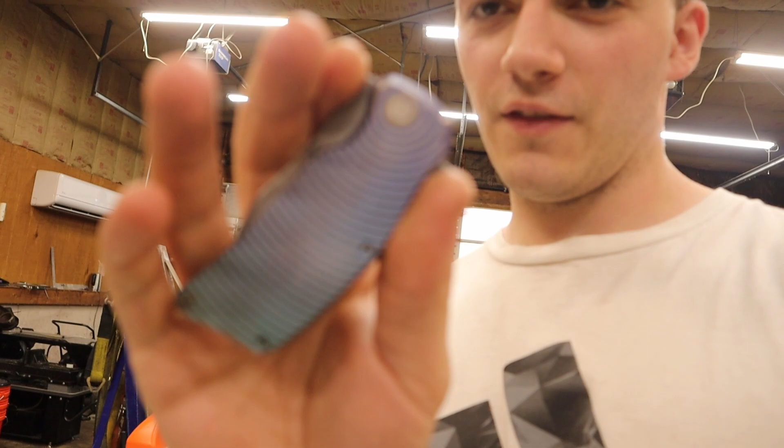I don't remember what I did in the last video, I think it was like 3 weeks ago. So let's just check knife progress. This is knife good, knife not sharp. Hold on. Yes, very nice. You got lucky because usually I can't flip it, I had to use gravity to help me out. Yeah, it's coming out pretty good.

So it's named Iris, and you might be wondering why it's named that. Well, Iris sounds pretty cool, so there you go. And yep, blade's looking pretty good, not sharp, but we'll talk about that.

The anodizing, the tool path, the fancy handle design - I mean, it's not fancy, but you know, it's different. Hold on, the camera focus is like way in the corner. Okay, here you go, there you go.

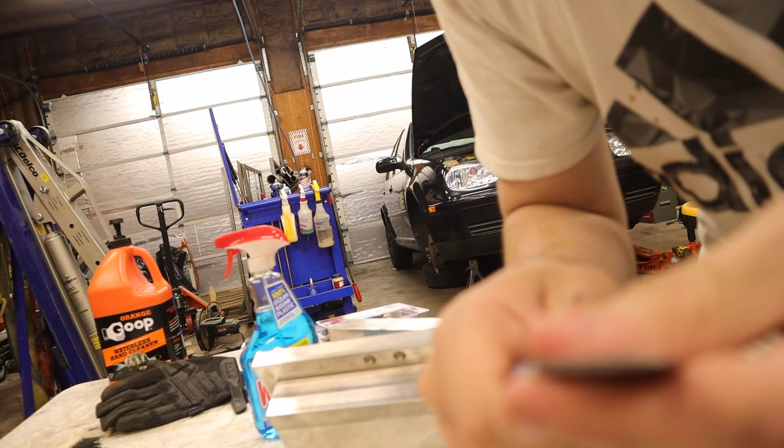So yeah, I still don't have threaded spacers because they're incredibly difficult to make. I mean, I have the spacers, but they're not secured, so that makes the knife kind of act weird. Yeah, it's very stiff. I kind of got the lock bar stuff pretty down, but yeah, very, very little to no blade play.

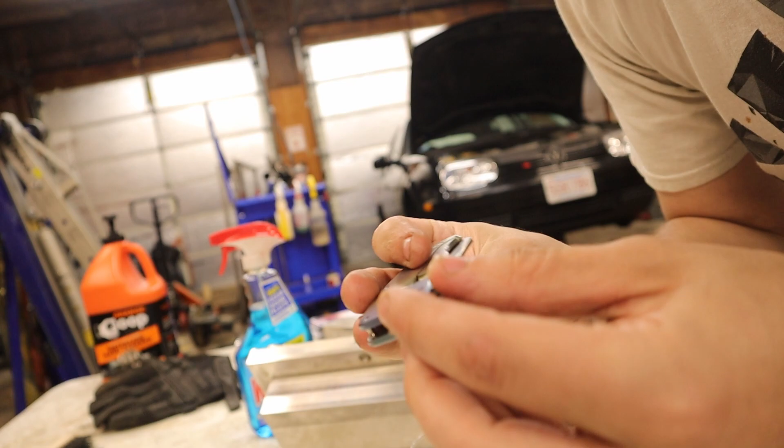Flipping wise, it kind of depends. Like right now, I think it's because the hardware is not in it, so I think that's kind of where I got my weird flipping motion. But yeah, it's coming along.

This is the backside anodizing. So what I did was I tumbled it and then I anodized it, so it looks pretty cool. It's kind of a rainbow, like a beat up rainbow, you know, we like that kind of stuff.

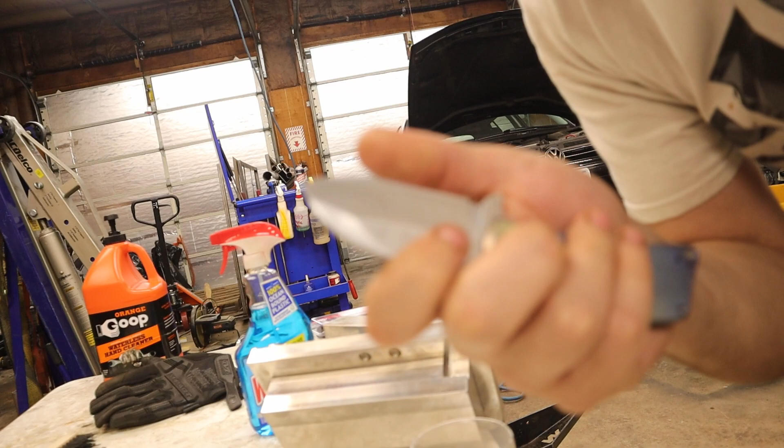I decided to remove any sort of feature from the blade. I think it looks a lot better with nothing on it. And yeah, this also isn't perfectly hand milled, but it is significantly better than the first one. On the backside, you can see there's some mill marks that were impossible to polish out.

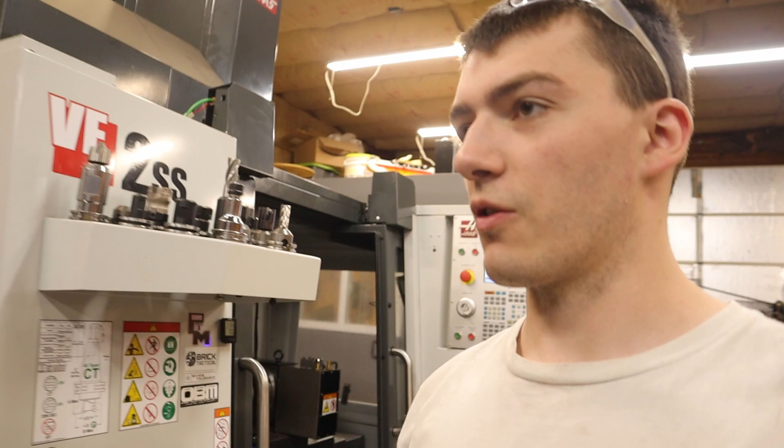Yeah, so why don't we talk about the belt sander that I got. So I obviously need a way to sharpen blades, so I needed a belt sander because I plan on making more than one of these blades sharpened, and a belt sander is kind of the way to go. So the belt sander I went with is an Origin Blade Makers belt sander. They're out of Oregon.

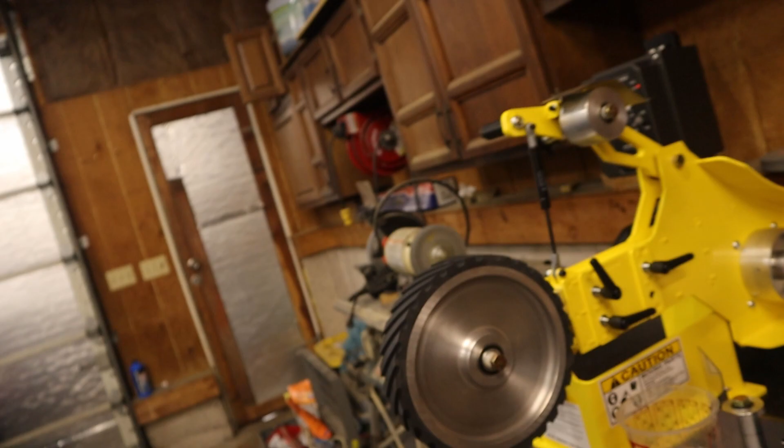Yeah, I mean, we'll just talk about it. So here it is, got a 10-inch wheel. I don't know anything about knife sharpening, so you're gonna have to excuse my noviceness. There's a flat platen with the tooling arm. It uses 1.5-inch tooling arms, standard.

The frame is steel, it's incredibly heavy. Like, just the frame alone was quite a lot to lift up, actually. So it's definitely steel, got this yellow powder coat. Would I say I'm a fan of the color? Maybe not necessarily, but it is just a color, and I could care less about colors.

The amount of research I did on belt sanders was mind-numbing and pretty annoying because there's a lot of different ones. Do you build yourself? Do you buy? So I ended up buying because I don't need to learn how to make a belt sander, I just need one. So yeah, it came actually really well packaged. I only had one damaged bolt or damaged piece, and it was this 3/8 bolt.

It was actually bent, which was pretty impressive, so it obviously took a nice hard fall on that side there. Yeah, it's packaged well. Like I said, it comes in cardboard boxes, but there's wood support, and it uses that expanding foam stuff, like the heat wrap stuff. So yeah, it was pretty well wrapped.

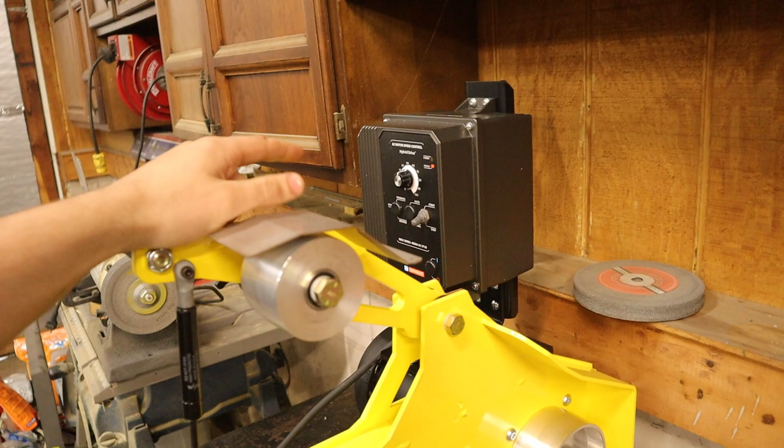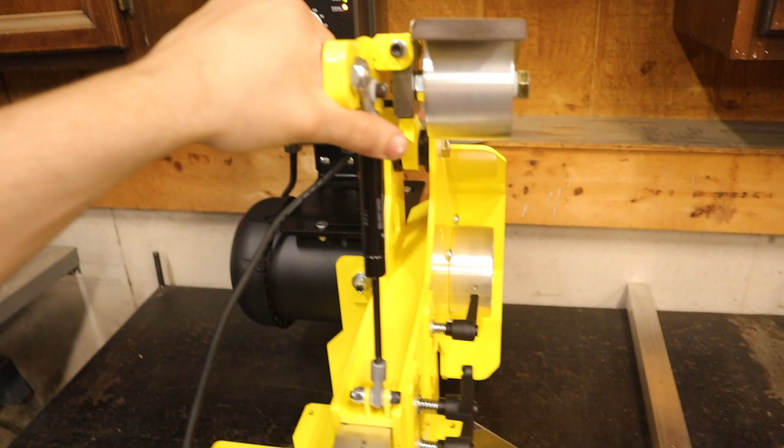The VFD and the motor itself, they come in different boxes because they're from different manufacturers. This is obviously on a gas strut, so I've heard gas strut's the way to go. I don't know otherwise because I don't have experience.

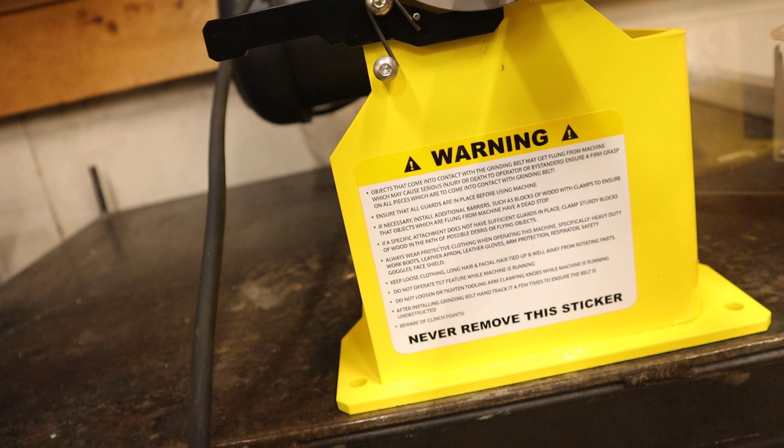It does tilt horizontally via this lever. You pull it, loosen it, and it actually has these - let me see if I can see - there's notches somewhere. On here there's notches. I'd show you, but it's not bolted down, and the motor's really heavy, so yeah, basically it tilts 45 or 30 and then all the way horizontal, so it's pretty slick.

I paid $2,200 after shipping.

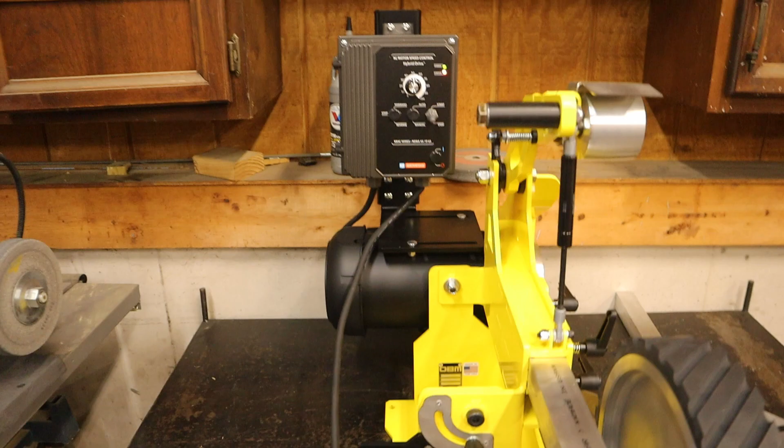So it's not cheap, the stuff's just not cheap. If you buy the motor and the VFD alone, you're talking like $700 basically. I think this VFD by itself is $500. By the time you build something that's really nice and spend your time, to me it's pretty close. You'd probably save $600, but it's a tough sell.

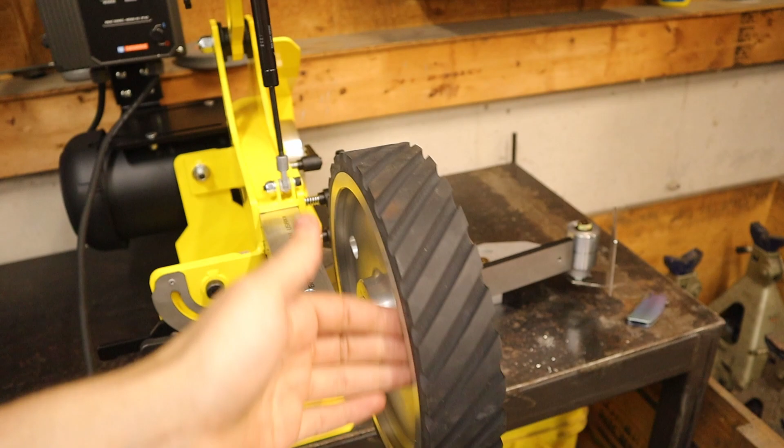This is extra, so I added this as an accessory. With the tooling arm and the wheel, that was basically $200 extra, I think. And it's balanced and everything. I actually haven't run a belt on it yet, as you can probably tell, but we can talk about the belts I got if you guys want.

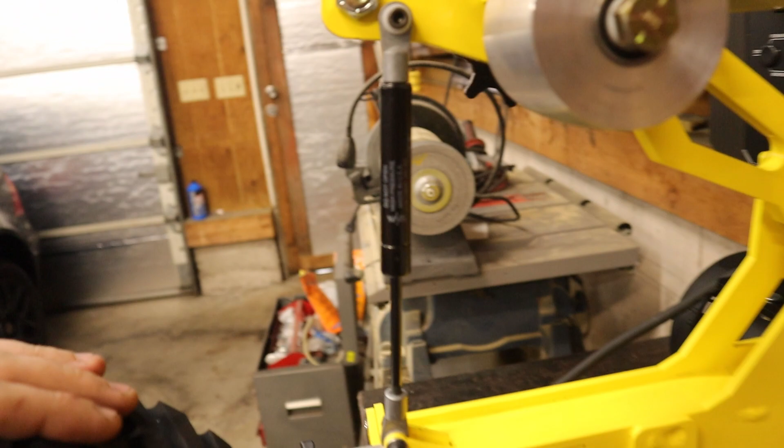The motor is from Mexico. It's sealed though. I would have liked to see an American motor, but for the price point it's hard to beat. The VFD is American though, and the frame itself and basically all this stuff is American. Believe it or not, the gas strut is actually American, which blew my mind because I had no idea anyone in America was making gas struts.

So that's that. Okay, let's move on, we'll walk towards the machine. I'll try not to trip on anything because there's stuff on the ground.

It's been a busy week. Oh, I will say, I had to use this outlet on the ceiling. I don't know if you can see that, the blue cord hanging around my thing. I just realized that's a terrible idea. But the wall outlets in here are actually GFCI, the current breaking limiters for water, when the outlet's near water you have to have those. So basically the two walls, there's a GFCI at the beginning of the wall, and they're all linked together.

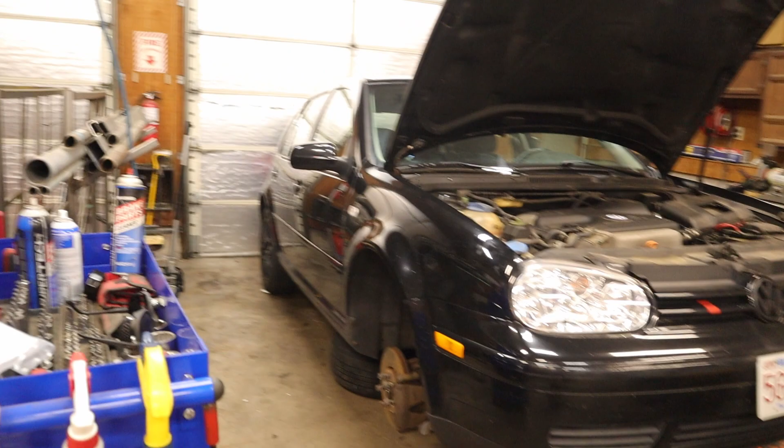That motor, it's a 110. It can be wired for 220, but I'm out of 220 outlets here. When it pulls that high amp start for this motor, it actually pops the breaker in that wall outlet. So I had to use a straight wall outlet, and the ones on the ceiling are not under that sort of ground protector. I thought it was broken at first, but after it kept popping the two breakers on both walls, I figured that's what it was. So that's my temporary stupid solution, as you can tell.

Moving on, let's talk about belts for a little bit. I don't know anything about belts, but I bought belts from one of the popular suppliers, not Combat Abrasives, just someone who supplies belts, also a lot of 3M stuff. This is kind of the stack of belts I got, and I got the square one, I don't know what you call it, but it looked cool and someone on a video said it was a good idea, so I bought it. I don't know what I'm doing, so I just bought what was good.

I got a stropping belt from Amazon, and stropping belts are leather with a compound. This also came with some belts, but this was USA made, and this is the compound you rub on the belt. I got a mix of aluminum belts, ceramic belts, and the other one like zirconia, I think. So we'll give that a test and see how it goes.

Let's see, other updates. Obviously the anodizing setup is now working, which is really good. That took me a couple days. I probably should have filmed it, but I've been in go mode because I'm back to working full time. I'm not on this off schedule thing anymore, so I've lost a lot of free time. It's kind of hard to record and upload in a quick fashion, but I have today off, so that's why I'm recording.

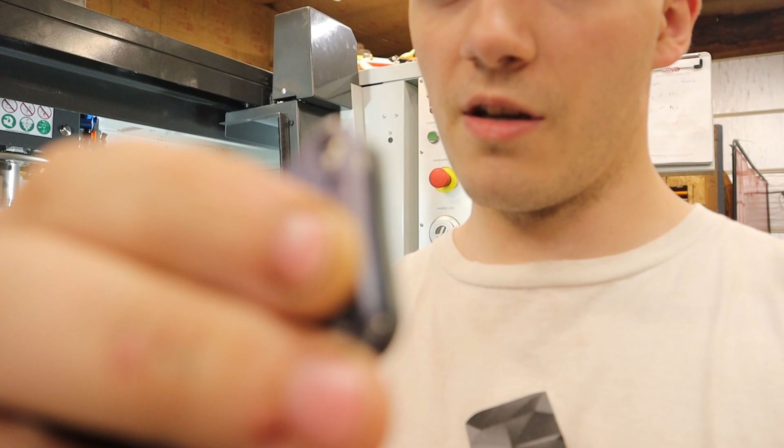So what I've done is the new clip will be cut into the bottom handle. There will be a cutout right here, and the clip will actually wrap into that bottom handle with hidden hardware, of course, because that's the way to go. That'll make the carry incredibly, crazy deep as possible. Only a little bit will be showing out of your pocket.

So that'd be cool, I think. Basically that. And that's what we're working on today.

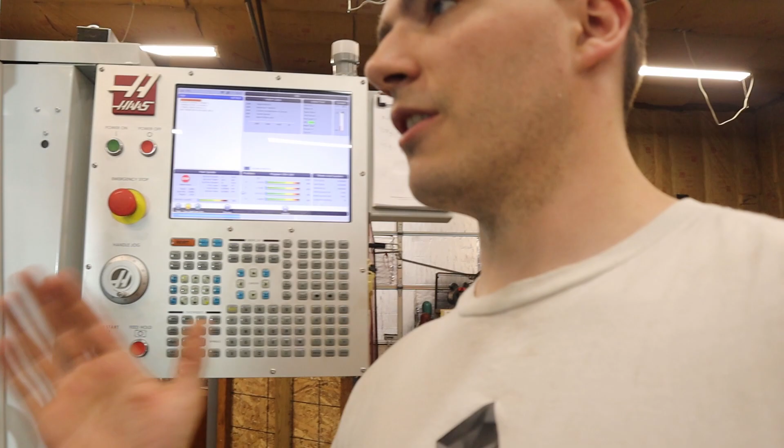Now, the clip is not straight at all, it's got a curve to it. The top is actually contoured like the handle. It doesn't match the handle exactly because it won't work like that, but it does have a contour, so we're going to have to use surfacing. It's going to be really cool, but titanium, of course.

The nature of it is it's a pain to fixture and make a fixture plate for, because of the nature of it, really.

So I have a 4th axis. I don't think you guys have seen it - a long time ago I showed a couple videos of it, but I haven't really used it for anything. I figured the clip would be a cool thing to use, a cool way to do it, basically.

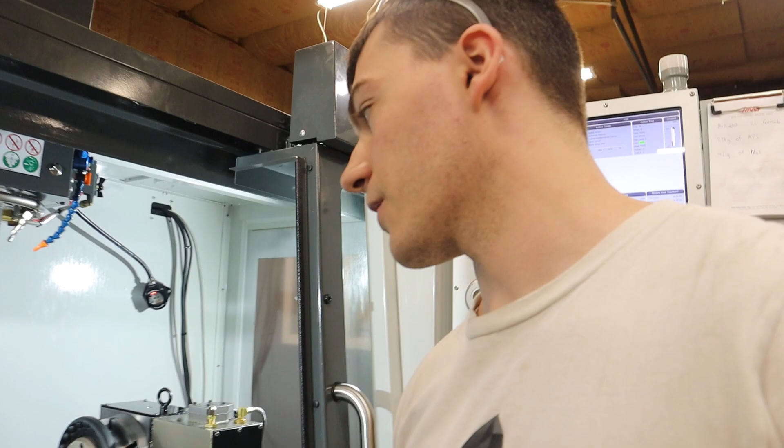Also, as far as cost goes, round bar titanium is a lot cheaper than square bar titanium by quite a bit, from the research I've been doing. So if I could just buy round bar and cut the clip out of it, that would save me a little bit of money, and it'd save everybody else a little bit of money too. Also, machining on the 4th axis is pretty cool and pretty challenging, so that's kind of fun.

And if I can get this to work, I'm going to do the lock bar inserts the same way. So as opposed to making a fixture for the lock bar inserts, we'll do it out of round bar, because that's cheap, and stainless round bar is cheaper than square bar.

So that's kind of the game plan, and now we'll talk about the actual setup. This is a very long one take.

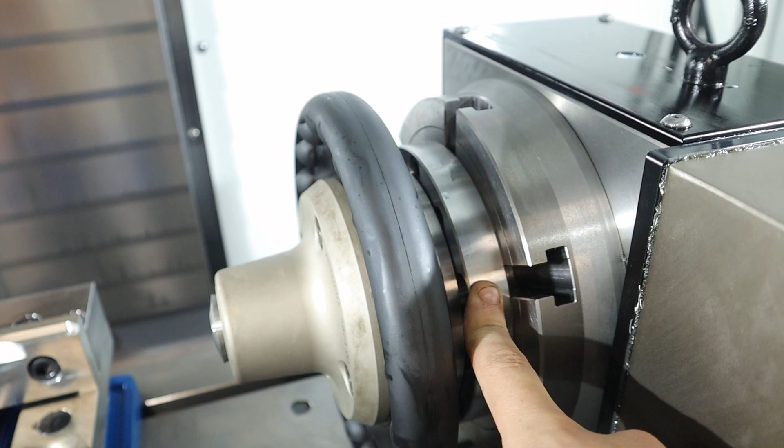So this is a 5C collet chuck. Now, doing some research, they usually don't run collet chucks on rotaries from what I can see - not many people sell an adapter for a rotary for a collet chuck. So what I ended up having to do was take the normal collet chuck adapter for a normal manual lathe and punch a bunch of holes into it to basically match the platter, the T-slot platter on the 4th axis.

It's a little bit longer than I would have liked, but I got it dialed in yesterday and it works. Dialing in stuff on a 4th axis is a huge pain, and there's like no videos on it on how to do it. The way I have it bolted is using three T-slots - one up top and two on the bottom, like a triangle. It took me an hour and a half to actually dial in the runout, and it's 1.5 thou total of runout.

Which after an hour and a half was the best I could honestly do. I ended up actually smashing my indicator, because you'd indicate the thing over and tap it down into place, and I ended up hitting the face of the indicator with the hammer, and it shattered. I was kind of annoyed because it's like a Mitutoyo, an expensive one. So then I had to order one, but luckily it was right on the tail end and I got it dialed in.

So yeah, there's a little bit of runout at the collet face. It's basically 1.5, I measured it with a 10th indicator.

I figure that's probably the best we can do. At the end of the day, what you can do is cut a side, turn it over, index it 180, then come in with the probe and probe a feature. You can update the work coordinate system to the center of the bar again, and that would verify things are in place. So that's basically a workaround for too much runout.

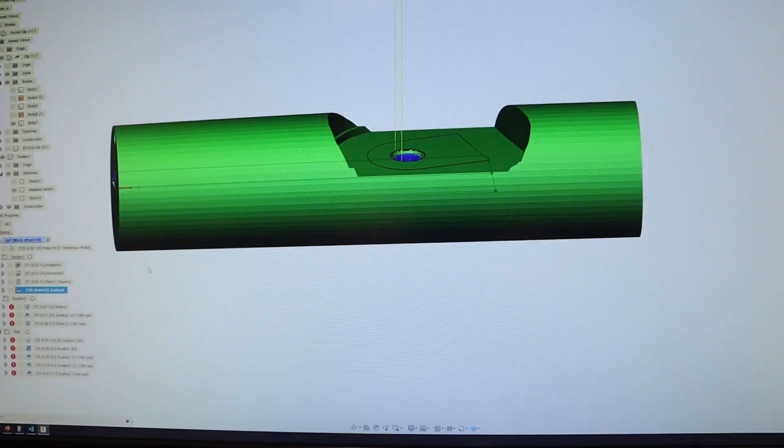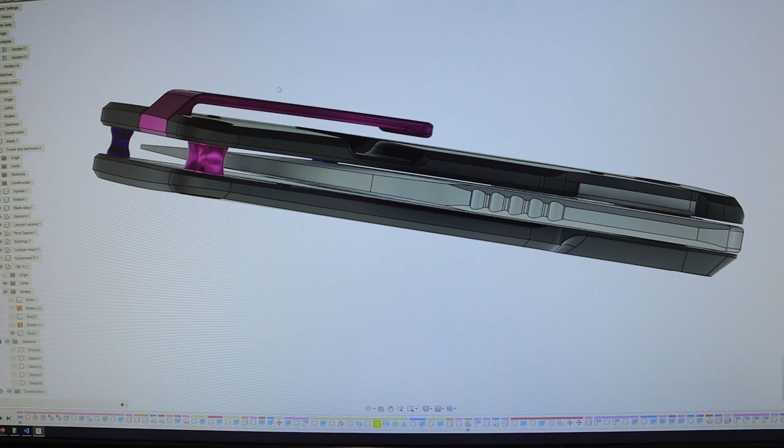Okay, so starting off, here is the clip design. I guess I'll show you guys the whole thing. So that's what the clip looks like on the knife. It's slimmed and wraps around. Not entirely sure if the height's gonna work yet, but that's the pocket right there. Bolt goes in there.

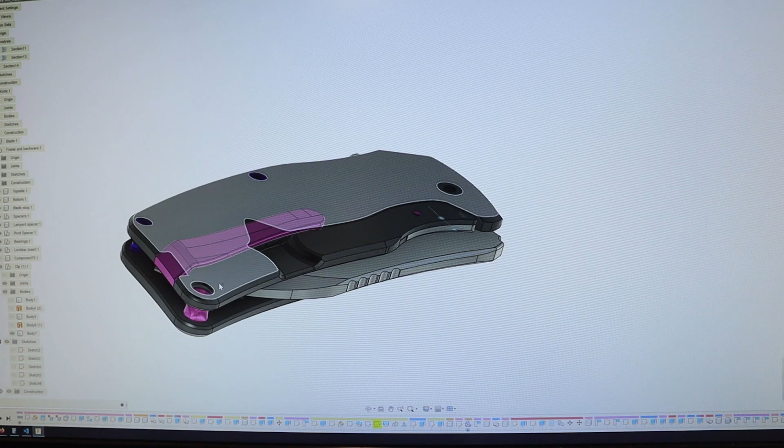Should be awesome if I can accomplish it, but probably gonna be one of the hardest parts. Probably definitely the hardest part on this entire thing.

So moving on to the actual tool path. What we got here is our part and a piece of 5/8 bar with an extra 1/2 inch on the back end for clearance against the collet chuck.

So I ran a test one yesterday and posted a couple things on Instagram about it, which was pretty cool. If you're not following me on Instagram, you definitely should. On that one I basically rotary toolpathed the entire thing, and obviously it came out too thin cutting it. So this is the new plan.

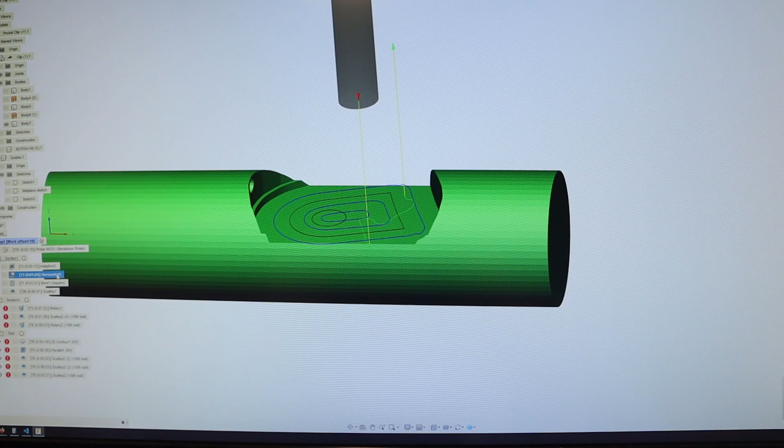First we're going to probe our X, which tells the machine where the front of our stock is. Then we're going to adaptive clear the top, the actual clip hardware hole, horizontal it down to final depth, bore, and then scallop the actual walls that the bolt goes around.

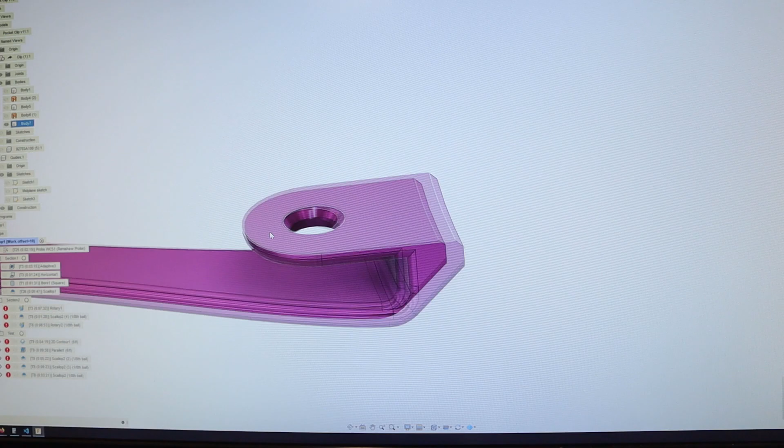That's called a countersink, by the way. Or is it a counterbore? I think it's a countersink, and a counterbore is the square one, or the flat-walled one. So we'll handle that first. Not sure if it's necessary to handle first, but at least we know that's the most important feature, to have that centered.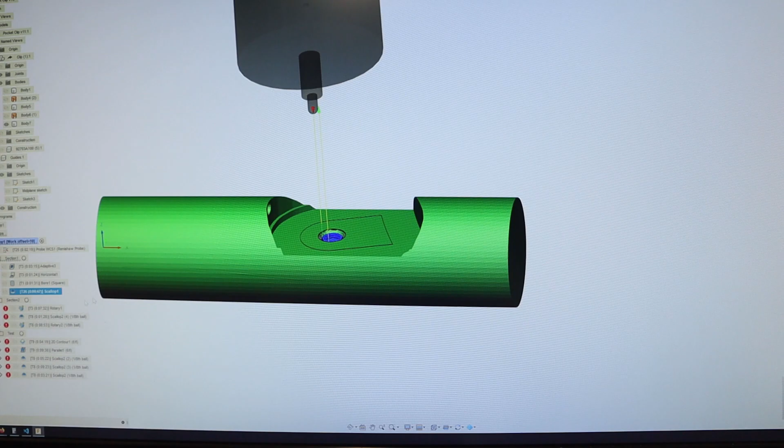So do that first. Then we break up the actual toolpath into sections. That way we can have the most rigidity on the part.

So the collet chuck is over here, the end of the part is over here. It's obviously going to be a long, thin part. So what we'll do is take it in chunks, doing a rotary to rough it out, then a scallop to handle the front, because the rotary doesn't like to do these tips rounded over.

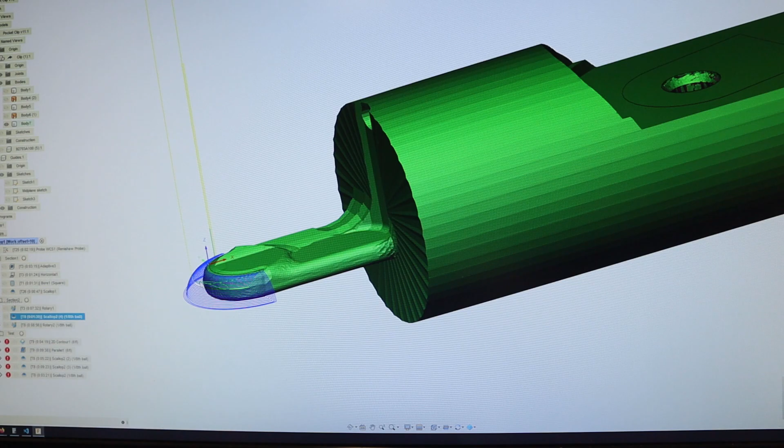Then a rotary to basically finish up the sides. Not entirely sure how that's going to look, probably like trash, we don't know until we try it. That's why we're doing this. We will continue to attack the part from here, but I just want to get these two sections done and see how it looks.

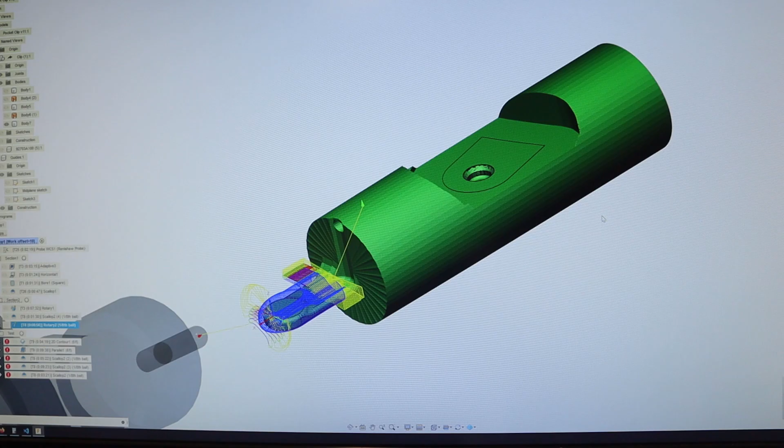So we have our piece of stock, I'm going to set it 2.5 inches out of the collet. Wait a minute, what is going on? Oh yes, oh, that's why. Not sure if this is enough stick out or enough meat in the collet. We will find out.

So tighten that up, that's where I had it set, that's where G54 P4 is set. I'm using P4, that's just another - I'm not sure what it is in Fusion, but it's like offset 10 or something.

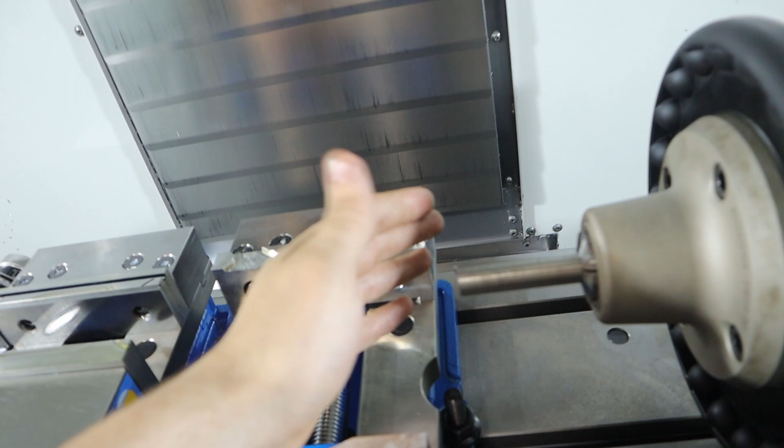So what should happen is the probe will come down and actually probe the face of this, and then it'll update X, and we should be good from there. I also haven't talked about this, but I switched probe bodies, or styli, whatever you want to call it.

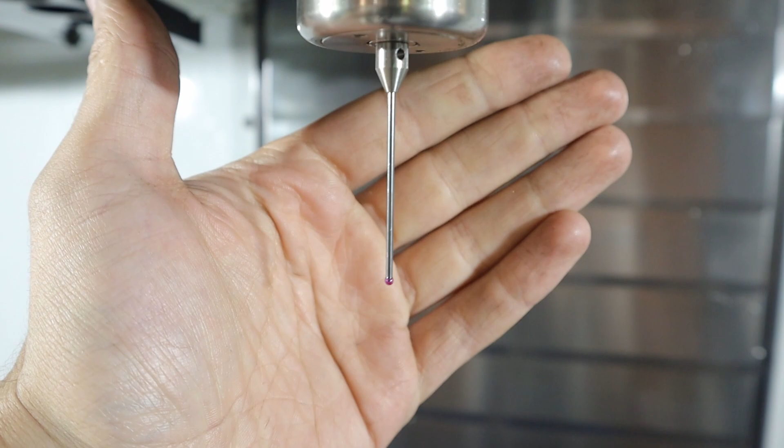So this is obviously a significantly smaller probe tip. Yeah, it's a 2mm, so I need that to do the small knife parts. So that's what we got. Let's see if this will do what we expect it to do. Make sure to turn your rapids down for this stuff.

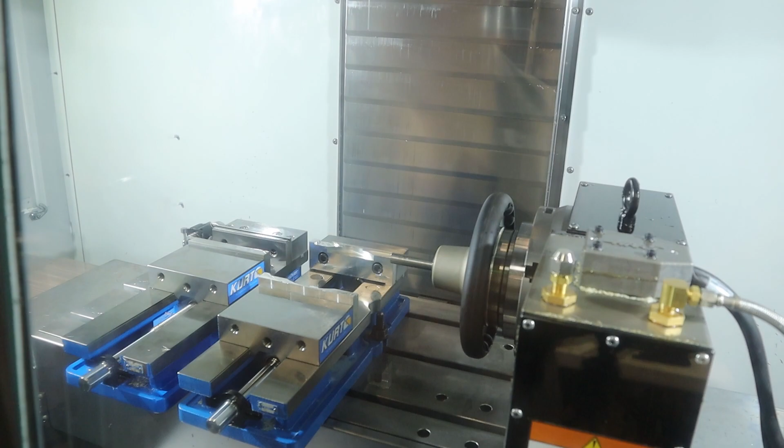Oh no. We're gonna be here a while. Okay, reposted it.

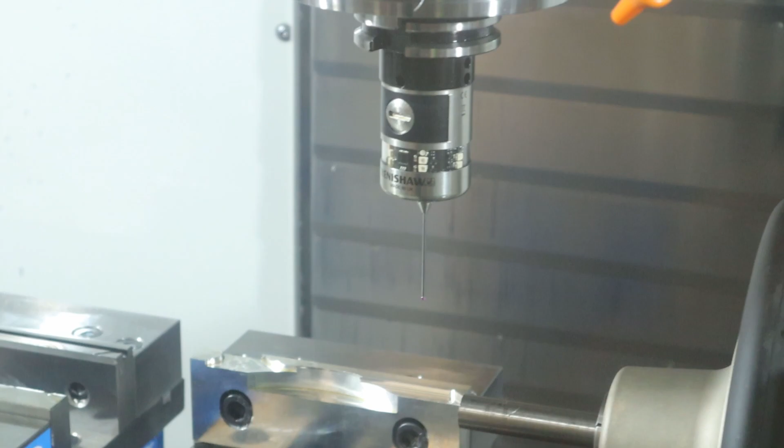Perfect, I think. Okay, I think that was correct. So now we're going to do this adaptive.

Hold on, let me switch something. Alright. Nice slow rapids.

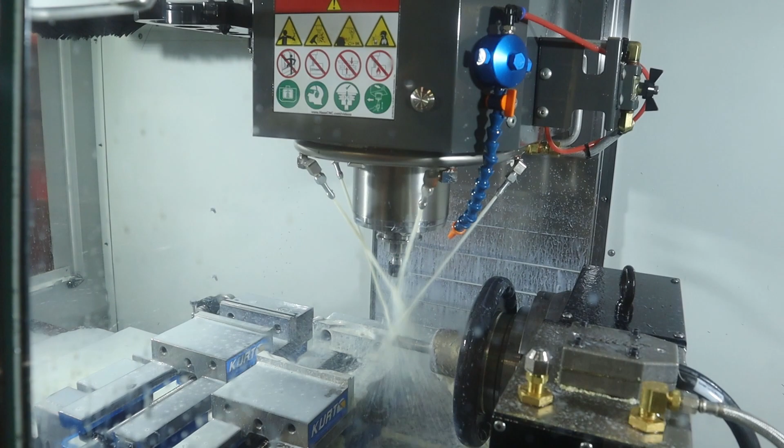Yeah, that's not correct. The end of the clip is not over there, so...

Okay, I think it's because I probed the Fusion, the probe area is a little confusing. So what I did was I modeled the stock, and let's see if that fixes it. So basically I'm going to probe the stock as opposed to the modeled stock, not Fusion's generated stock. And that should do what we want.

And I think it's not going to approach it. I think it thinks it's in the wrong spot. Okay, I reprobed it to the correct location, so now we will see if this is correct. Alright, that looks a lot better.

So we'll see when it actually touches off and updates if it's the same or really close to our X offset, which means that it's updating the work coordinate system in the correct location.

So what we have is, this is our X value, and we'll see how much it changes by. So yeah, that's correct, only 1/10 of a difference.

So now we know that this system's properly working, and it should put our tool in the correct spot. But I've been wrong before.

Yeah, that looks a lot better. So I'm gonna go nice and slow on both everything, and make sure position, distance to go, make sure we're in the good spot. Oh yeah, we're definitely good.

So yeah, it's gonna go ahead and adapt that out, and we'll see. So that sounds a lot better. Or not.

So yeah, we'll see how this goes, and yeah. Alright, here's where we're at. That's after the adaptive and the horizontal.

So that's a little bit of a chunk out. And we're going to go ahead and bore and then scallop the hardware hole. This might be too much material to remove up here, so I might actually start up here and work my way back to this, but we'll just find out.

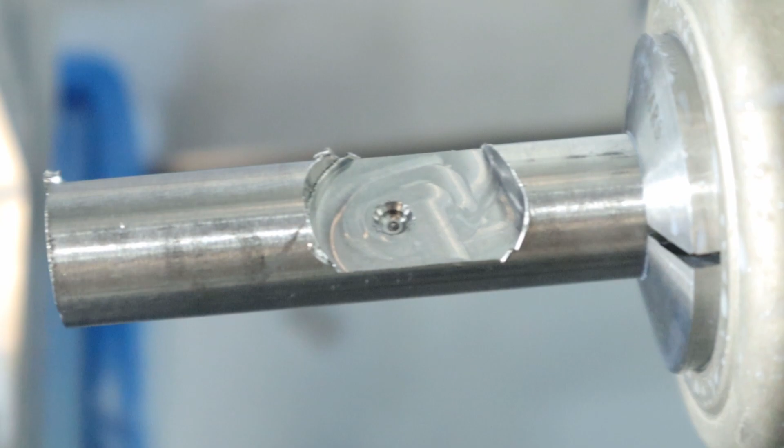Okay, not bad for first section. So there we go, roughed out, horizontal on the top, then the hole for the hardware, and then the scallop to clean up the actual countersink.

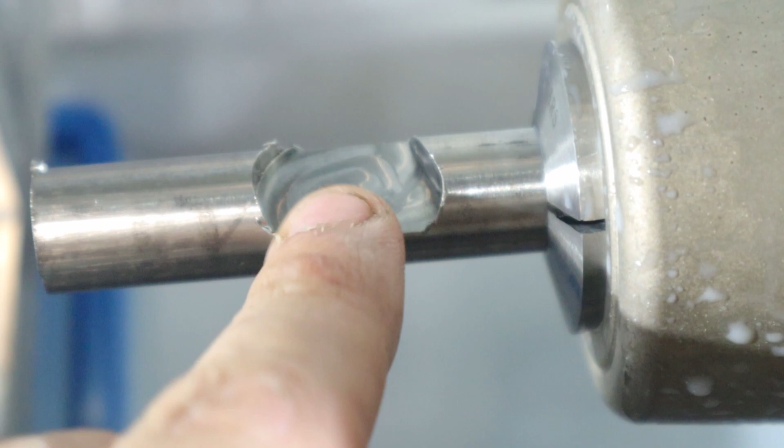Sweet, so now we're going to start milling the first section, and I wonder if this much material removed will cause it to chatter like a mofo, but we will find out.

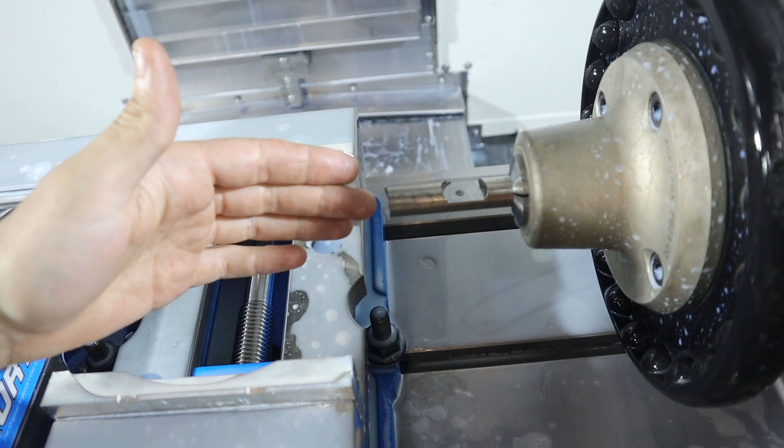Okay, here comes the cool part. So now what's going to happen is we're going to take a 3/16 end mill, and we're actually going to use rotary toolpath to cut a circular motion toolpath simultaneously, blah blah blah.

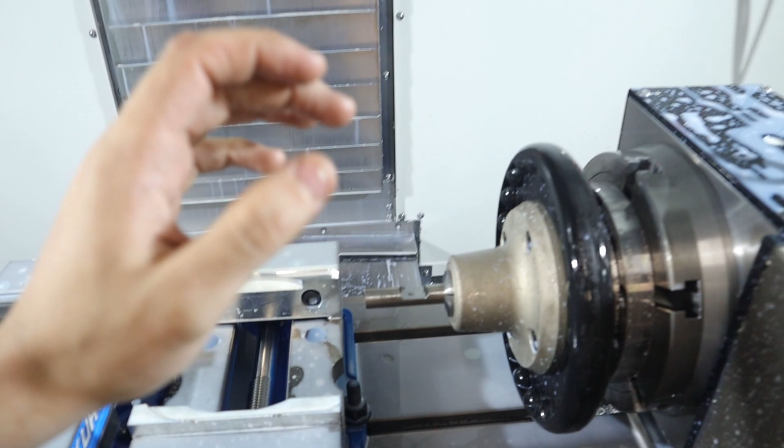So it's super important to note that these rotary moves hate not having look ahead. So you actually need to enable look ahead or high-speed machining in your controller, and I only have 60 hours remaining of high-speed machining because I'm really poor.

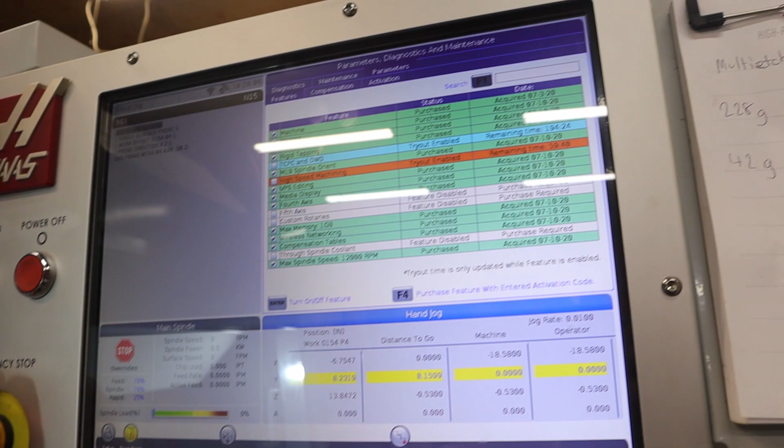So I have to turn it on and off every time I want to use high-speed machining, and you basically have to use it to do simultaneous fourth axis moves. Otherwise the fourth axis move is really jittery and your tool paths will come out looking like garbage. So we will turn that on, we will start the tool path, and then we will see how it goes.

Damn, dude, that's crazy. Guess we'll fix that.

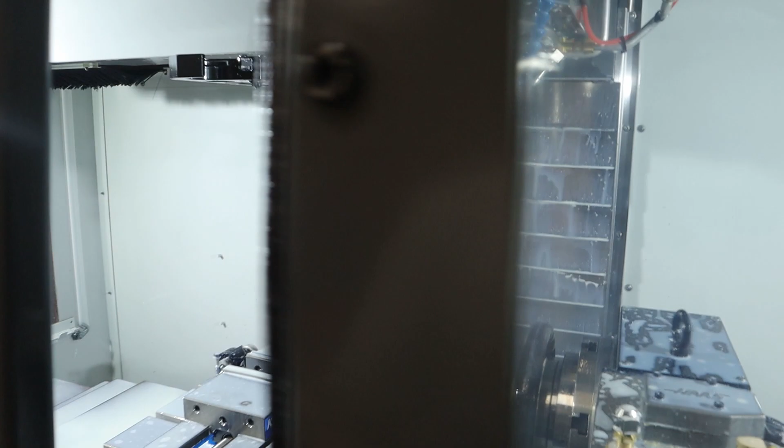I wonder how the end mill is. Oh, it's still sharp. Yeah, it's kind of weird.

Okay, so Fusion doesn't like that setup, I guess. So what we're going to do is adaptive down, clear a flat area above the top, and then start the rotary from the start of the part as opposed to having it offset from the front. Because having it offset from the front caused it to do those really weird linking moves, and those weird linking moves were obviously not good for the end mill whatsoever, but very good for the comedic factor.

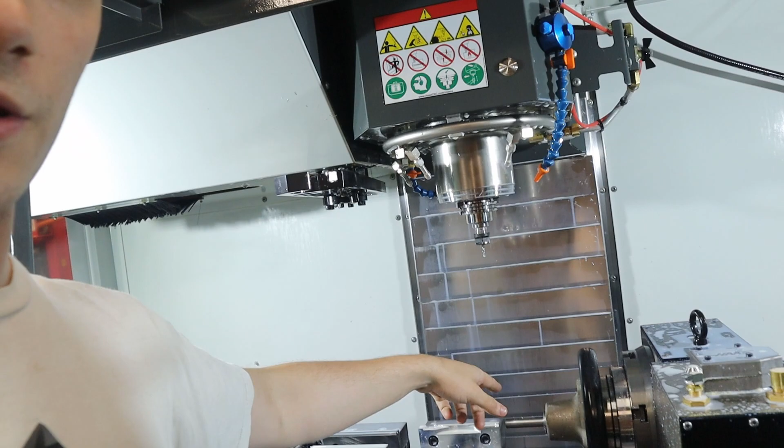So yeah, we're going to adaptive. It's going to be on the same plane that the bored hole is, and then it'll start the rotary toolpath, which may or may not break the end mill because of the axial depth load on it, but we'll see.

Fusion doesn't have an inner radius setting or an inner diameter setting for rotary, which is kind of strange. Yeah, I bet you can control it with sketches or bodies, but I haven't tried that yet, so yeah, we're just testing here.

Oops, I forgot to turn the high-speed machining on. So here's the adaptive. That end mill is definitely dull.

Oh yeah, she dull. We'll send it in here though for that adaptive and see how much life we can get out of her. Alright, here goes nothing.

Not the worst thing I've ever heard. Okay, here is after that adaptive, the rotary with the 3/16, even though it's dull, the finish is pretty nice. Obviously the end's not done - that's what I was talking about. Rotary sucks at doing ends of stuff. So now we're going to do a scallop to clean that edge up, and then we'll do a rotary with a ball end mill and see how it turns out.

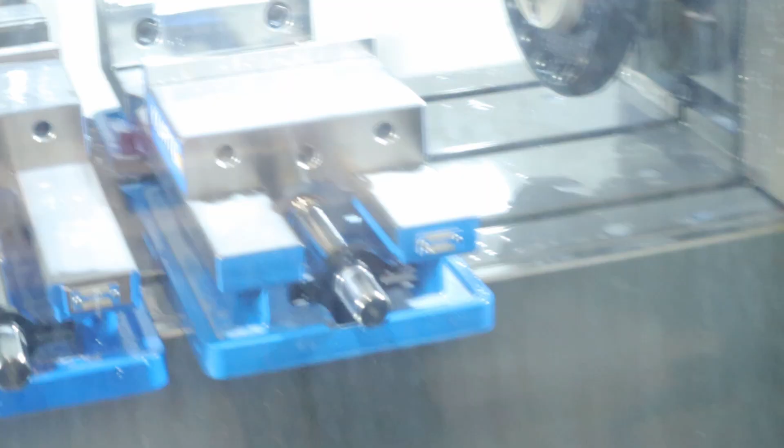Okay, well that didn't go that great. I'm not entirely sure why, but one of the linking moves caused the ball end mill to slam right through the center of the part. So yeah, thanks Fusion! Okay, so we were obviously unsuccessful on the second one because of this linking move.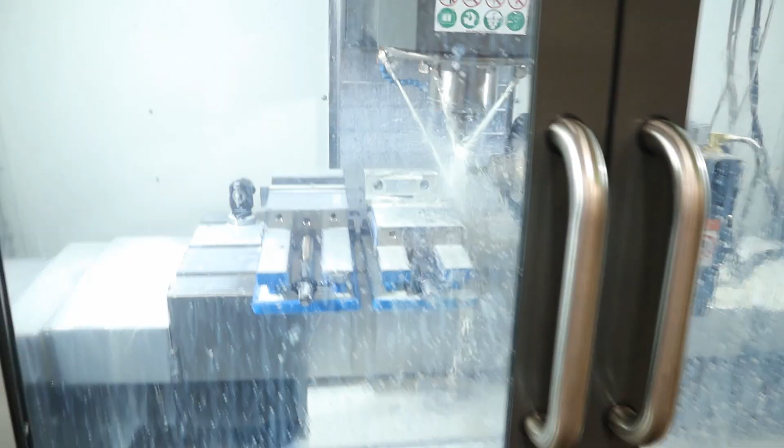I don't know, in Fusion it doesn't show it linking into the part, so I don't know what to tell you. Then we blew the cutter up trying to do a rotary with a ball end mill. No good. So now what we're going to do is adaptive clear all 4 sides, and then we're going to rotary, so we'll see how that works. Oh yeah, I definitely blew the cutter up, it was spectacular. Okay, so far nothing has exploded.

And yeah, so let's go over here. So I'm in the middle of doing this. So we're going to try to sharpen this old blade and see what we get.

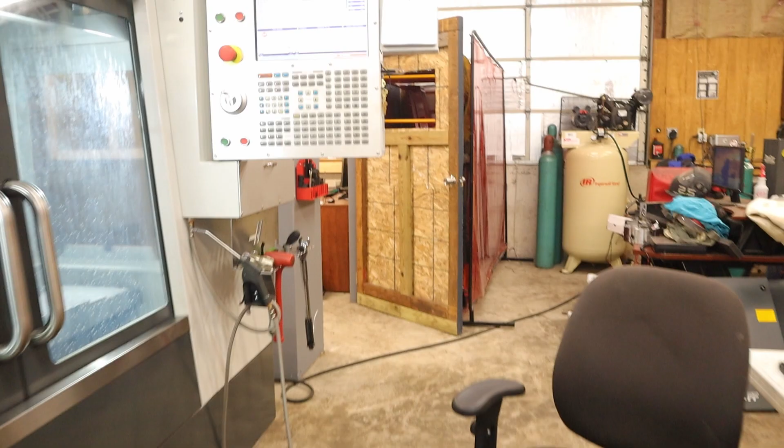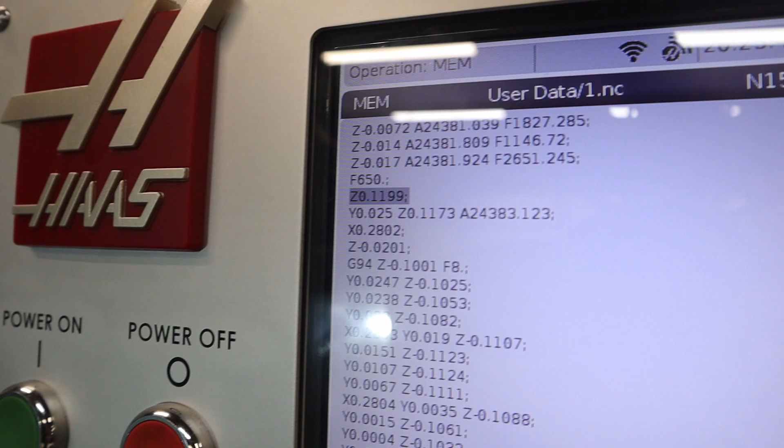Okay, didn't get very far doing any sanding. I don't understand this no feed rate error. Like, I don't understand why it takes the feed rate and then splits it on the line. So yeah, that totally messes us up. Rotary, how dare you?

Just so you can see where we're at though.

Oh yes, it appears to have gouged the part again. Very nice, very nice. Good job, Fusion. Good job. What's that, the 3rd one? The 4th one? Nice, real nice.

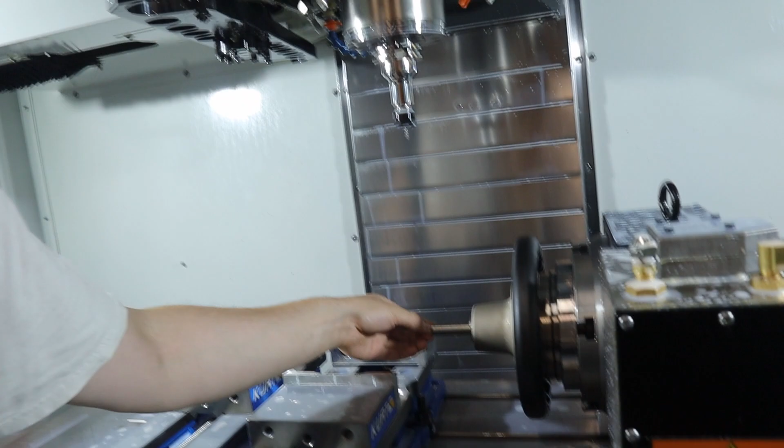Okay, so what I've decided to do - obviously we're gouging the part, I'm not entirely sure why. The toolpath in Fusion doesn't look like a normal rotary toolpath with it going around. It's got this like, it goes and then it does this loop-de-loop, so it has something to do with the geometry of the part, and Fusion doesn't like it. Rotary's kind of new, so maybe, I don't know, benefit of the doubt and all that.

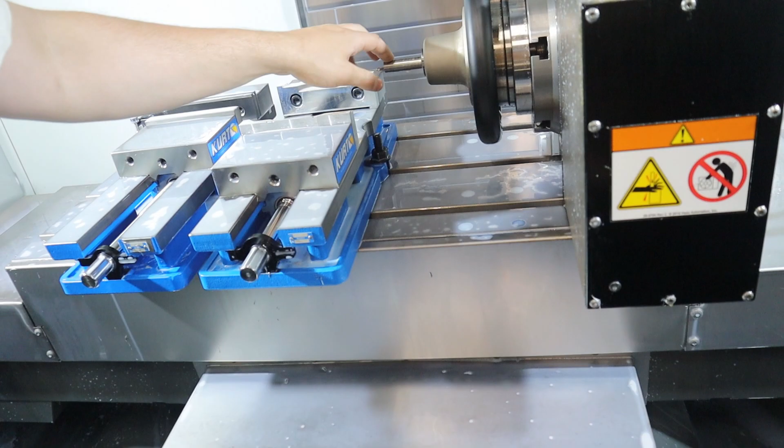So what we're going to do is, I'm not going to scrap this one yet. There wasn't too much chatter on the end, which is a good sign. So I've divided the part up into sections - section 1, 2, 3, 4, and etc. all the way through. What we're going to do is run section 2 now and see how it actually turns out.

What I'm doing is an adaptive, I think I said this, adaptive all 4 sides, horizontal on the top and bottom, and then we're going to scallop the 2 sides for the radius, the fillets or whatever. Yeah, I think I won't have to use high-speed machining either, and the surface finish should come out pretty good. This is a good way to see if we'll have chatter, and if this way works, then maybe we'll be able to load up a fresh bar tomorrow and see how it actually turns out. But I'm just going to work my way down the part and see how it turns out. So yeah.

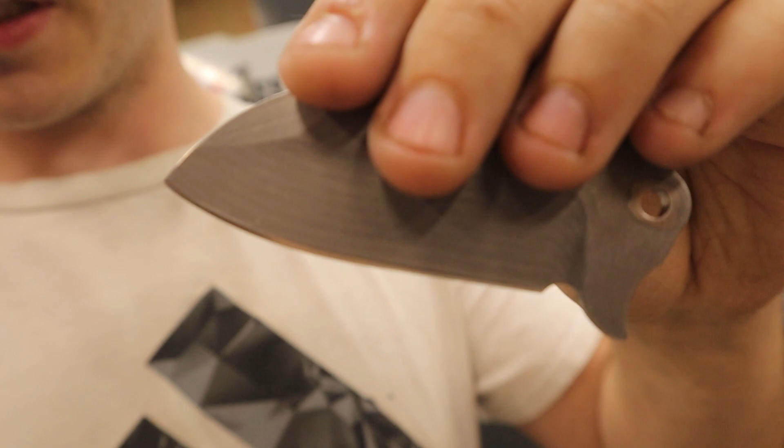Okay, so while I was running, I was sharpening an actual hardened blade. So that's what we got - first hardened blade sharpened. They don't match at all, but I will say that I shaved this part of my arm off, so that's pretty good. It's not super sharp, it kind of hurts when I do that, but see, there's hair on the blade.

I didn't film it because it's kind of boring, and I don't know what I'm doing. Okay, now as far as the machining goes, not as positive as I would hope.

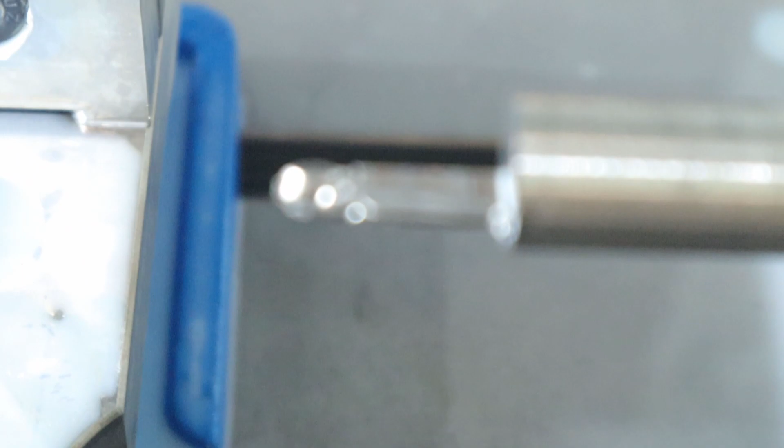Can you focus? There you are. So it looks like it didn't even round the edges over, and it has something to do with the fact that the part is not concentric to the spindle, so I don't think it even touched it. I'm not entirely sure what the fix is, but that's what it looks like. Let me work on that, I guess.

Okay, so I'm gonna end the video here. I'm gonna work on that rotary thing, or the blend thing, the thing I was just talking about.

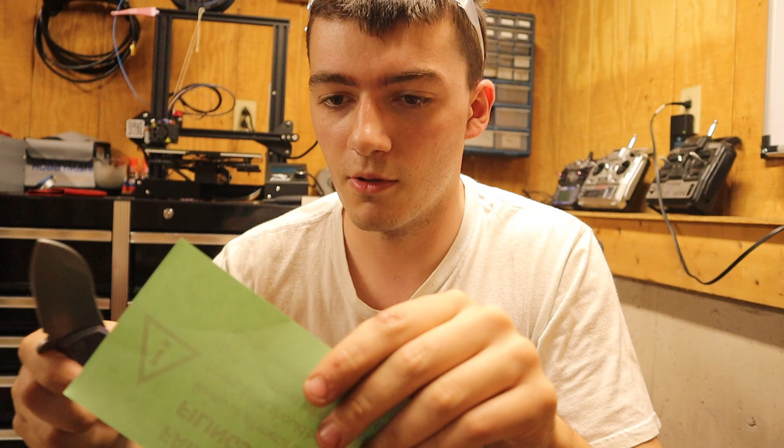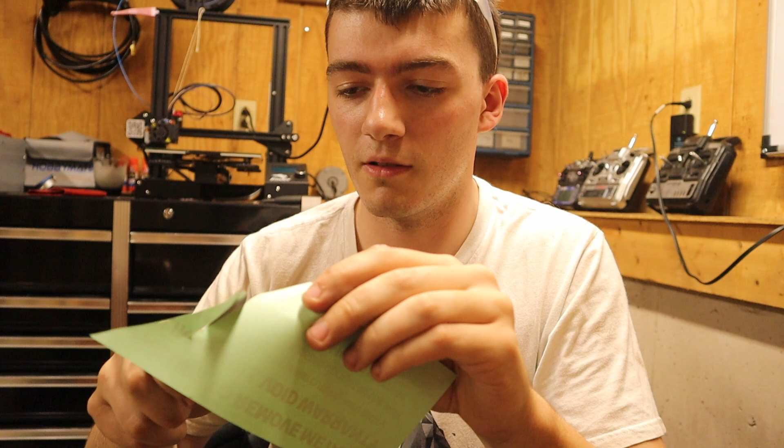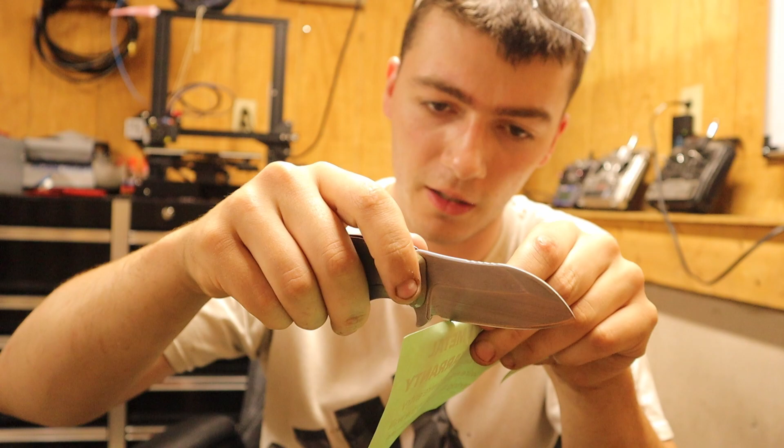Oh, it works. Oh, it's a little dull on the end there. Oh yeah, dull right there. Oh, the tip's pretty sharp. I wonder if I can see where it's dull. Okay, we'll try right here on the back. Oh yeah, oh wow, it's dull right there. Wow, it's really sharp right on the end of it.

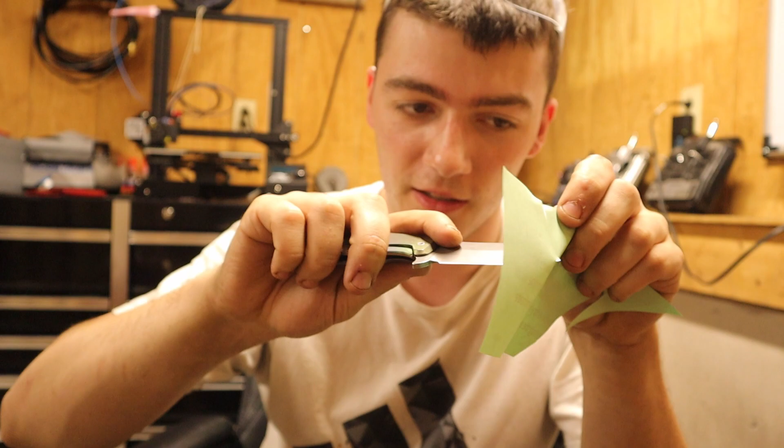I guess that's cheating if I go in the middle like that, isn't it? Not bad, not bad, my arm really burns from doing that. Anyways, so it's the first hardened blade sharpened, and now it's incredibly dangerous for me to be playing with it in my pocket, but yeah, not bad.

I might resharpen the bottom side of the bevel. I'm not entirely sure what's the best way to do that - do I go to a high grit, like a 240, and go up, or do I go all the way down to like the 80? I don't really know, because I don't know what I'm doing.

It's kind of weird, but I think it's because of that hardware not being in there. But yeah, it's definitely going to be a good flipper for sure. When I put pressure on it, it acts a lot better, but fighting gravity is a little harder. I have to work on that - there's a crunchiness right there from the detent ramp not being the proper slope, I think. So it's something I had to work on.

Also, I'm changing to ceramic bearings, or balls - ceramic ball for the detent. Bad... better. So yeah, getting there, very close.